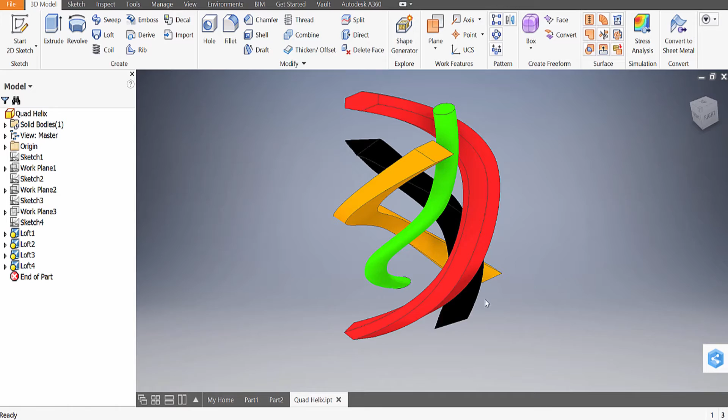In this tutorial you're going to be designing this structure, which is a quad helix using 4 different shapes. So stay tuned and I'm going to explain how to design this.

Go ahead, open Inventor and start a new standard.ipt file. Once you've done that, go to Start 2D Sketch and click on this plane in your window.

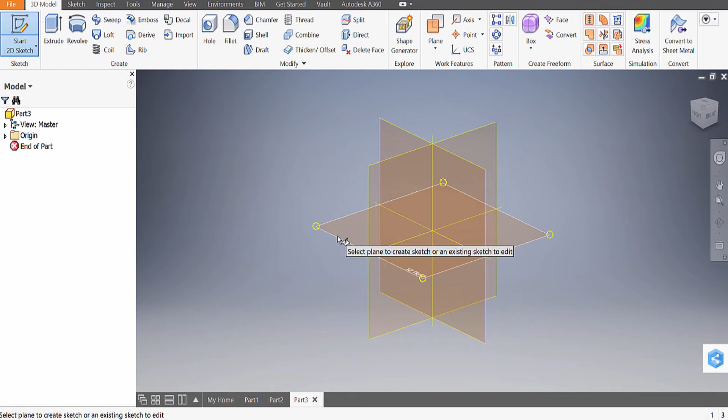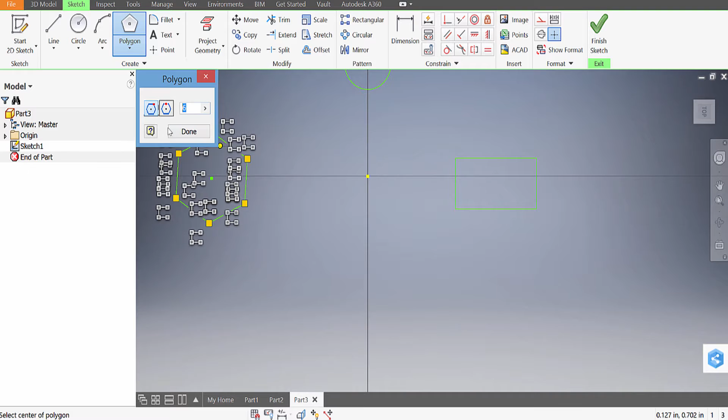I want you to draw out 4 shapes. The first will be a circle. The next will be a rectangle. And underneath the rectangle, we have some options here, so go over to the polygon option. I'd like you to draw a hexagon on one end, and let's go ahead and just make it 3 sides, a triangle on the other.

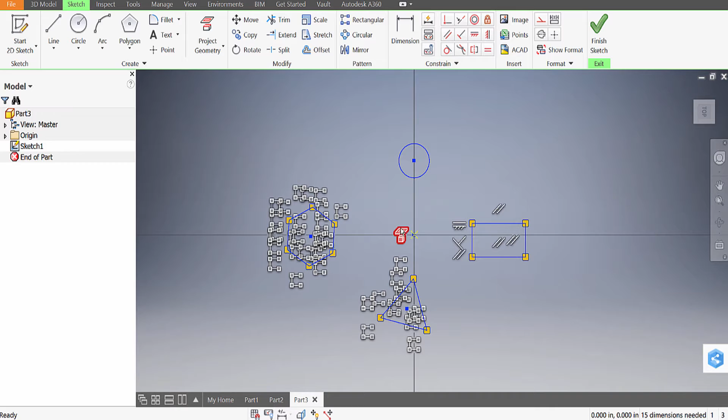So it looks something like this. Once you've done that, I would like you to select all of these shapes, right click, and then go to the option that says copy. We're just going to copy those so we don't need to continuously make them. And I'm going to finish the sketch. So we have these 4 shapes.

And if you've ever thought of a double helix, like if you've ever thought of DNA before, that's kind of what we're going to do, but we're going to do a quad helix structure with 4 different shapes.

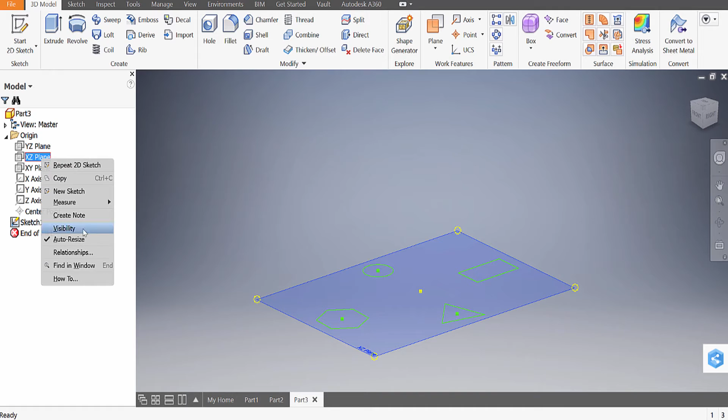And right now we have no planes to work on, so let's go ahead and get another plane back. So in the origin folder, click on that arrow and turn your XZ plane back on by right-clicking and selecting visibility. And now we're going to offset this.

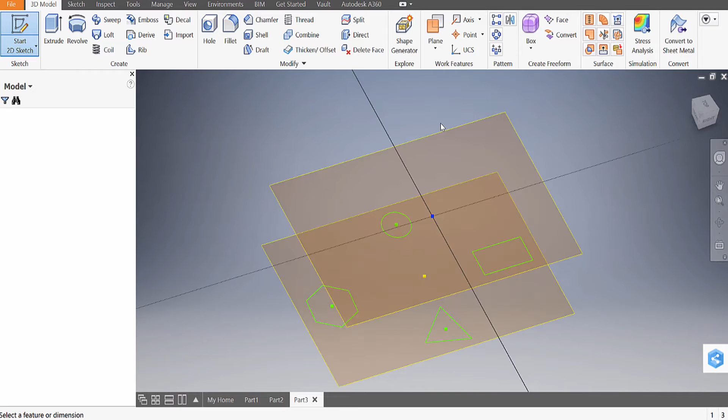So go to Start 2D Sketch, and I want you to click and hold with the left click and drag up a plane a reasonable amount of distance. That's going to vary depending on the size of the shape, but move it up a reasonable amount of distance, place it down, right click, and go to paste.

So it should have pasted a copy overhead, so you can see that. Once you've done that, I would like you to select all of them and make sure you're looking at the top view. So I selected them all. Then go to the option here called Rotate.

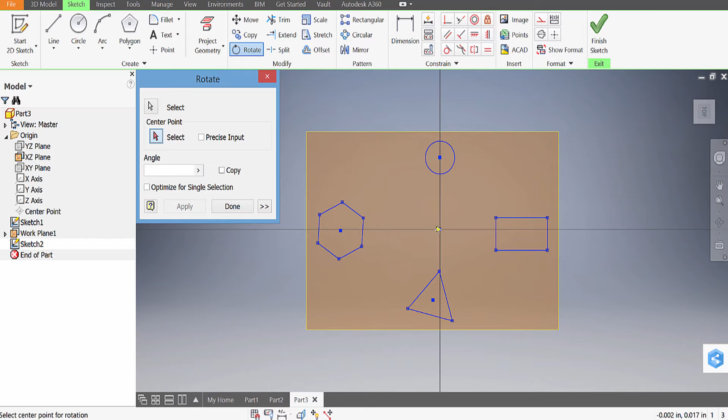Now the Rotate tool is very useful because if you click on it and you had everything selected before, go to Center Point, click on that, and click on the middle of this entire thing. And you'll notice this might pop up, just click yes, that you're able to freely rotate the objects. So all I'm going to do is rotate them 90 degrees and click.

Go done, finish this sketch, and then let me just see how high this one is to that so we can get it similar. And if you want to see how high this plane is, just double click on it really quickly. Usually works, unless you have that thing popping up like I do. So I could double click on it from here, and it's 0.5625 for me.

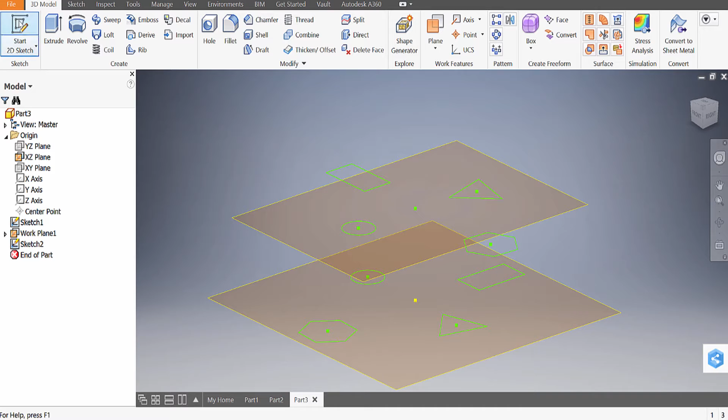So I'm going to start another sketch on this plane, drag that up, 0.5625, click OK, right click, and once again I would like to paste it. But of course I don't have the paste option, so finish sketch, go back to the last one I made, which for me is sketch 2.

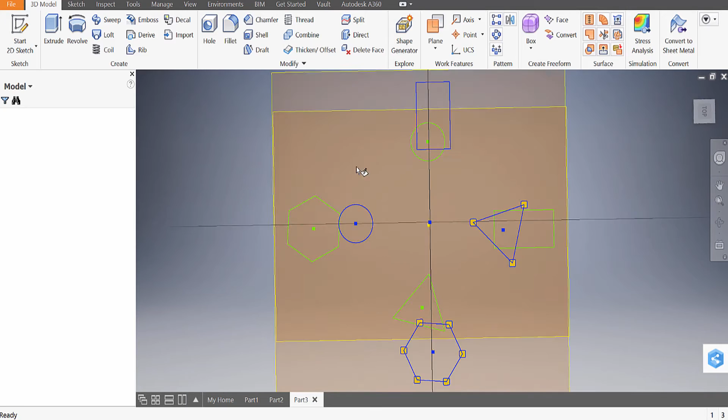You can see it light up over here. Look at sketch 2, notice that it lights up. Double click on it, select it, and I'll only select what's on sketch 2, right click, copy.

Now I'm going to finish the sketch, and to get back here I'm going to go to sketch 3, because that's where I created that sketch. Right click, paste. So it pasted a copy, you can see what that looks like.

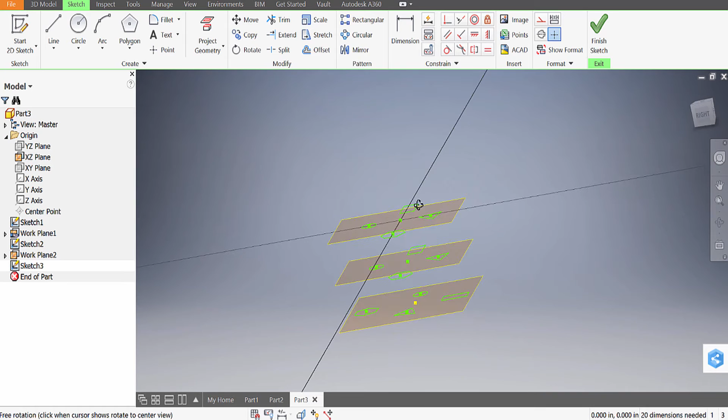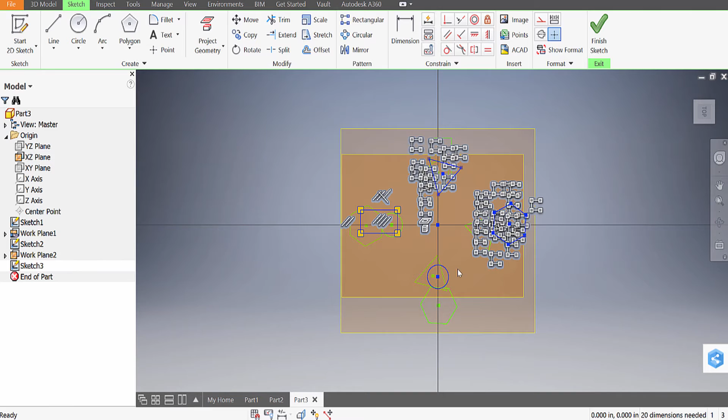Once again, I'm going to go look at the top view, select it, go over to rotate, center point, click on the center, and rotate it again one more time like that. Click done, and this time I won't forget, I'm going to select it, right click, copy, finish sketch.

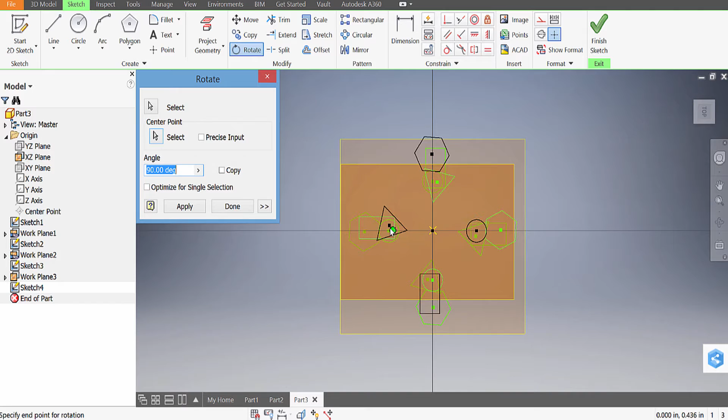Let's add one last plane. So Start 2D Sketch, drag this up 0.5625 or whatever your unit was, click OK, right click, paste, select, rotate, center point, click on the center, and rotate it 90 degrees like that, and finish sketch. Okay, so there we go.

We have 4 sketches. And now let's go ahead and make magic happen. We're going to start one at a time. So the loft tool is located right here.

Because we created multiple sketches on each image, we're going to have to select first the sketch. Notice that all 4 of them light up when I hover over one. You got to click on that, and then you have to specify which one you want to loft, because you can only loft one thing at a time. So I clicked, and now I'm going to click on the hexagon.

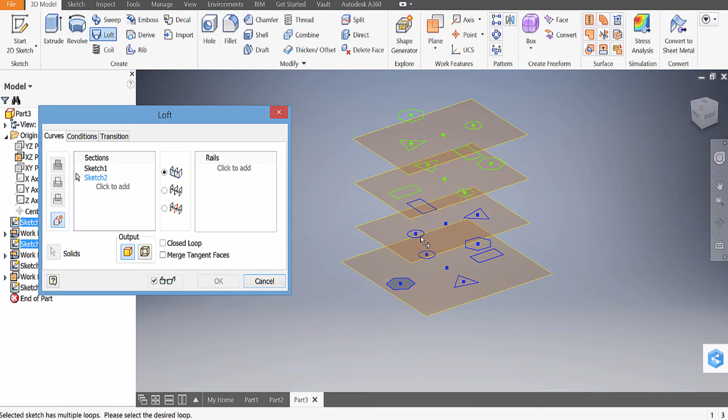Before you click on the top, go over here where it says click to add. Click on that, and then we're going to click on the next sketch. So click, and then click on the one you want. Hexagon goes to hexagon. Click on that. Click to add.

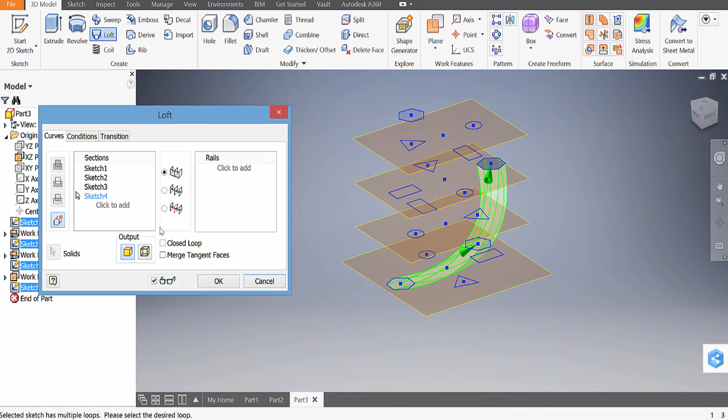Click on the next sketch, which is this one, and then select the hexagon. Click to add. Select this sketch, and then click the hexagon. Click OK. And if you did it correctly, you should notice the hexagon sweeping or lofting across the entire structure. And right away you're like, well, that's great, but all my sketches are gone.

Now remember, it's never gone. It's always under the thing you did last, usually when they just vanish like that. So the last thing I did was a loft. So I bet you if I look under the loft tool, those are my sketches right here. So right click, turn the visibility back on of all 4 sketches.

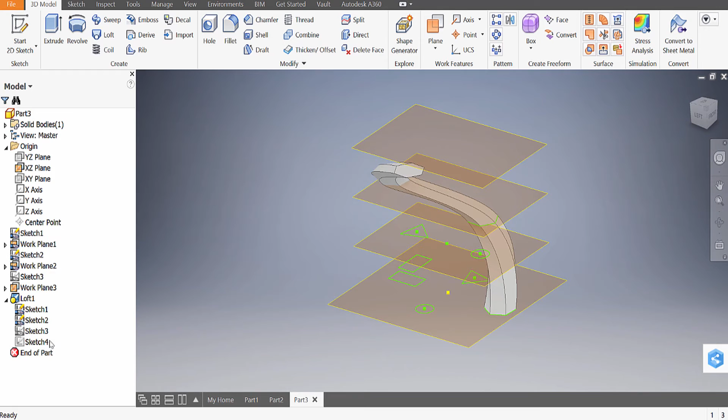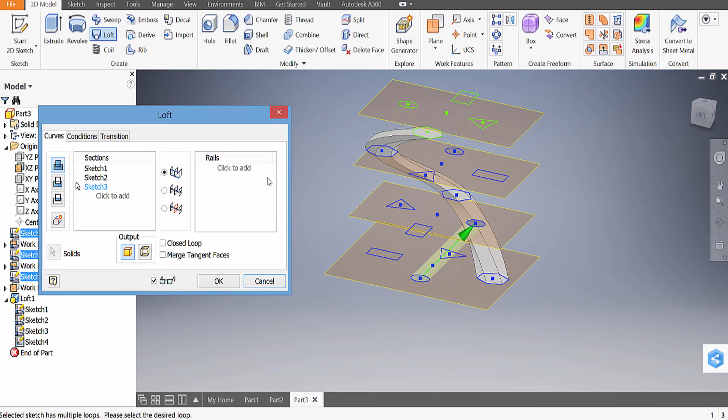Now select the loft tool and start with another shape. Let's start with a circle. Click on that, click on the circle, click to add, click on the next sketch, click on the circle, click to add, click on the next sketch, click on the circle, click to add, click on the next sketch, click on the circle, and OK.

So you can see what's happening there. I'm going to go ahead and continue this, and if you think you got the hang of it, go ahead and try it yourself. We are creating a quad helix structure of 4 different shapes.

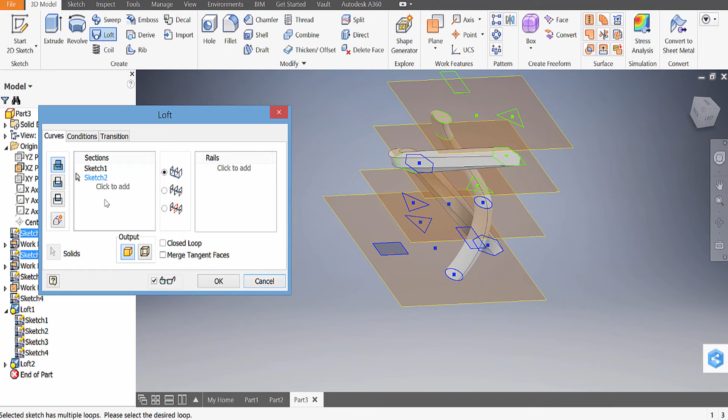Whoa, this thing looks really cool.

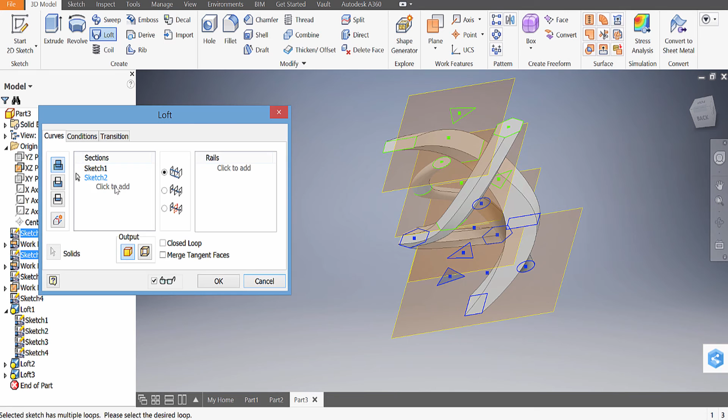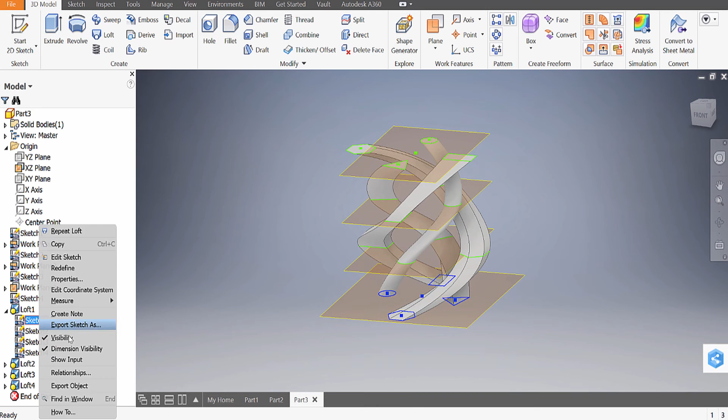Okay, so there we go. It's magnificent. I'm going to go ahead and hide all the sketches, so I'm going to turn the visibility back off. I'm going to hide the planes by going here and right-clicking and turning off the visibility.

There you go. Go ahead, go to Tools, Adjust, and select. Oh boy.

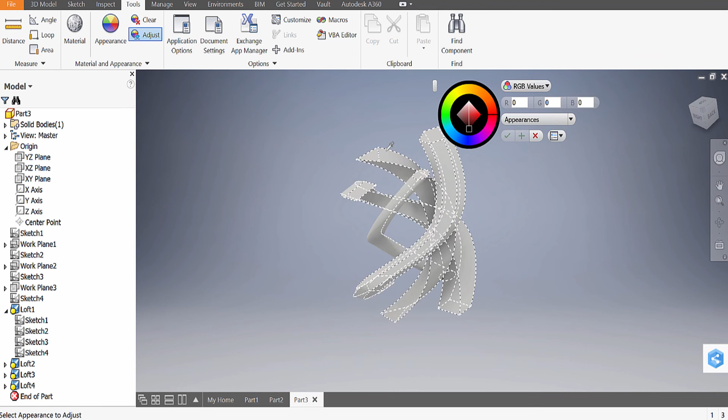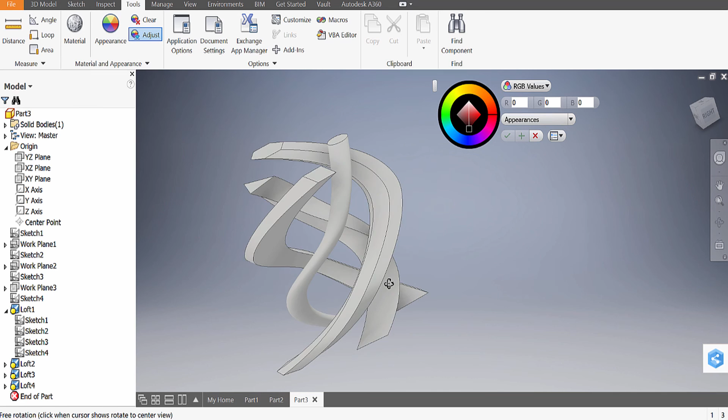I think it'd look really cool if you color this. So go ahead, add some color to this and get a rendering screenshot of it. But this is the power of the loft tool. You know, you can get any shape you want, and this is just a single shape. In the next activity, we're going to do it with different shapes. But you can see that it's very powerful, and it's really, really cool.

So go ahead, start adjusting the colors of this, and once you do, get a screenshot, and we're going to eventually add it to our sites.